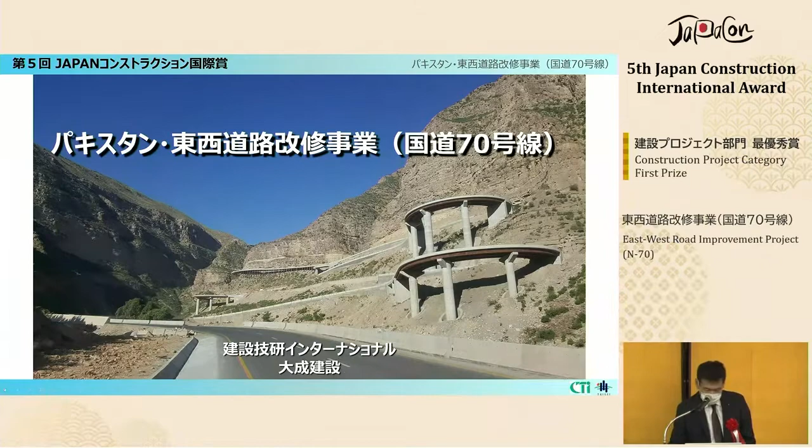This project is part of the National Road Improvement Program in Pakistan, financed by loan assistance provided by the Japanese government. The aim is to enhance the overall capacity of the N70 corridor and make the road more resilient against natural disasters.

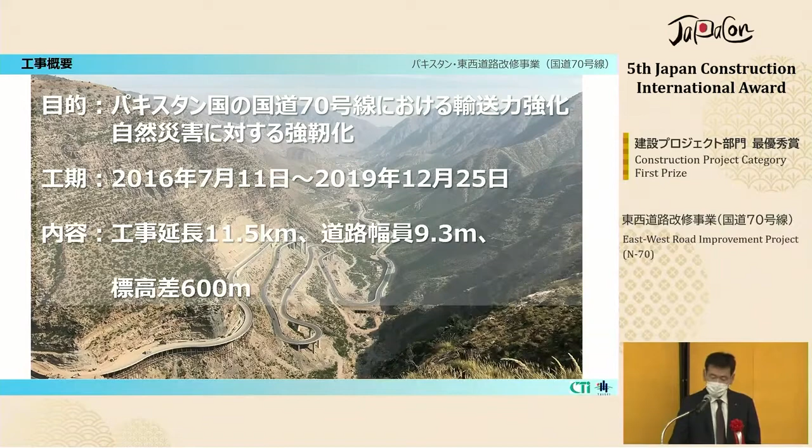The consortium headed by CTI Engineering International provided advice and expertise in design and operation management, and our company completed the construction. The project improved a 12-kilometer road with a height difference of 600 meters in steep mountainous areas. Construction started in 2016 and completed in 2019.

This is a map of the area to give you background on this project. Route N70 is one of the major highways running through central Pakistan, connecting the two major cities in the east and west of the country, from Multan to Quetta, 445 kilometers in distance.

There are major cities like Islamabad or Karachi in the eastern flank of the Indus River, which runs through central Pakistan, and there's a well-developed transportation network connecting north and south of the eastern half of the country, but there are only a few major highways connecting the thriving east to the mountainous west.

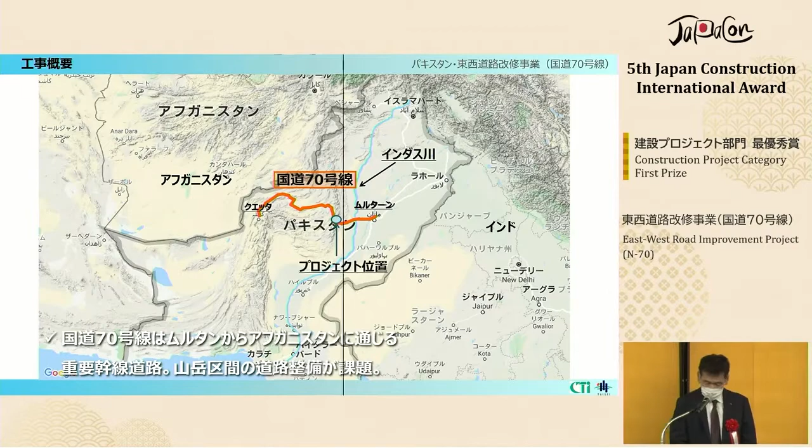Route N70 is an important road connected to the border with the neighboring country, but improvement was coming in late because the section in the scope of this project is known as the hardest part in the steep mountainous areas, requiring advanced construction technology and expertise.

This is the situation of the road before the project started. Sedimentary rocks form the steep terrain, making it a vulnerable foundation, with weathered rocks strewn on the slopes beside the road.

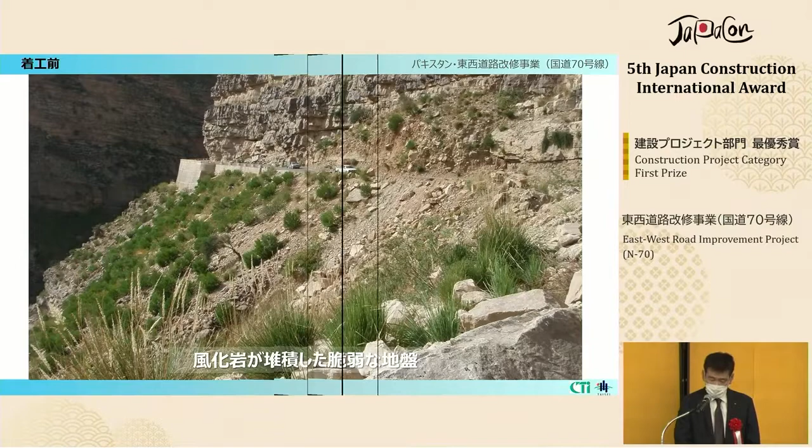The narrow road itself runs on the steep slope with a lot of congestion and closures along the way due to debris and fallen rocks.

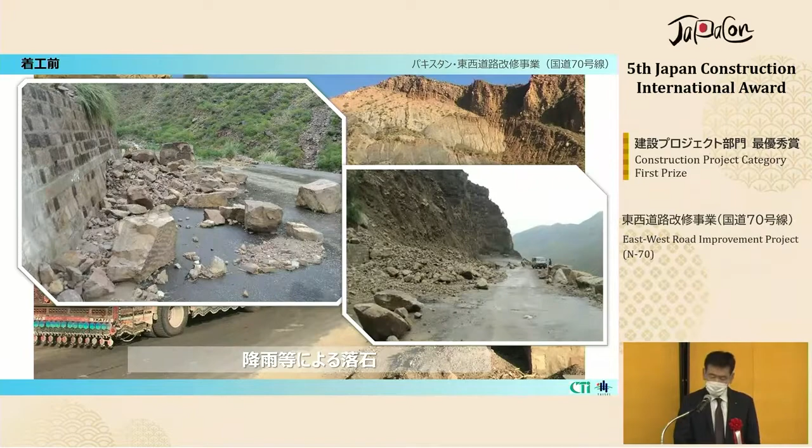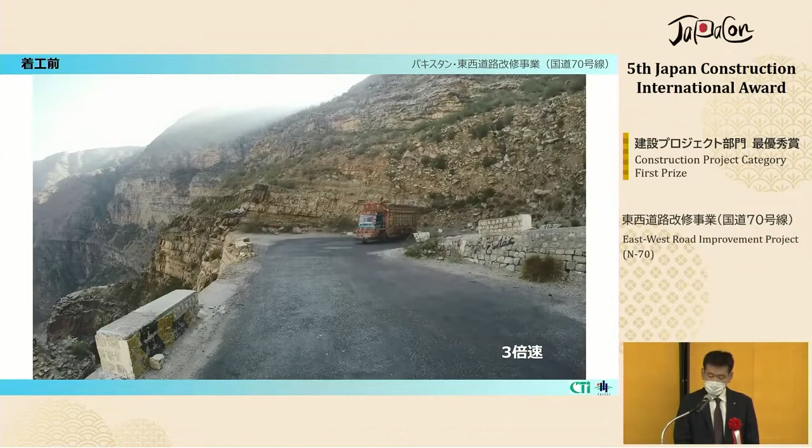The section of road in scope of this project was particularly narrow and steep, with a series of tight curves, and vehicles had to stop to go around them. As shown in the picture, these trucks needed to turn the wheel several times to let other cars pass through them.

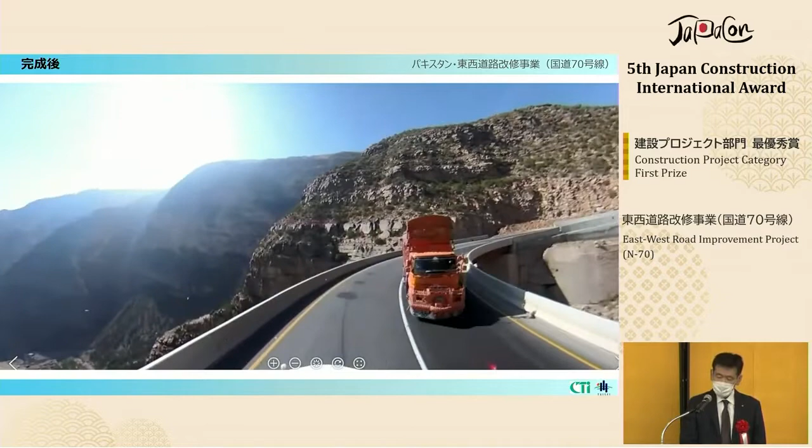This video shows the same section of road after the improvement. There are 2 lanes on the road, and those curves were made much smoother so that heavy trucks can easily go around.

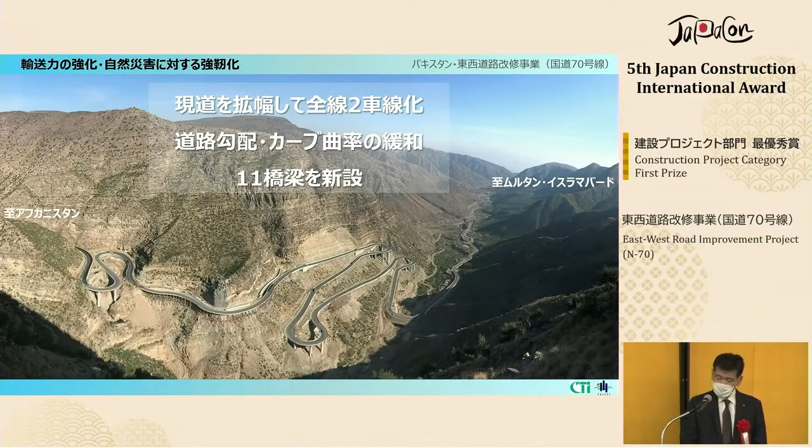This is the summary of the construction methods adopted in this project. The aim was to increase overall capacity and resilience against natural disasters. We expanded the road width to 2 lanes from end to end and improved road alignments in terms of slope and curvature by constructing additional 11 bridges at the steepest sections and sharp curves of the road.

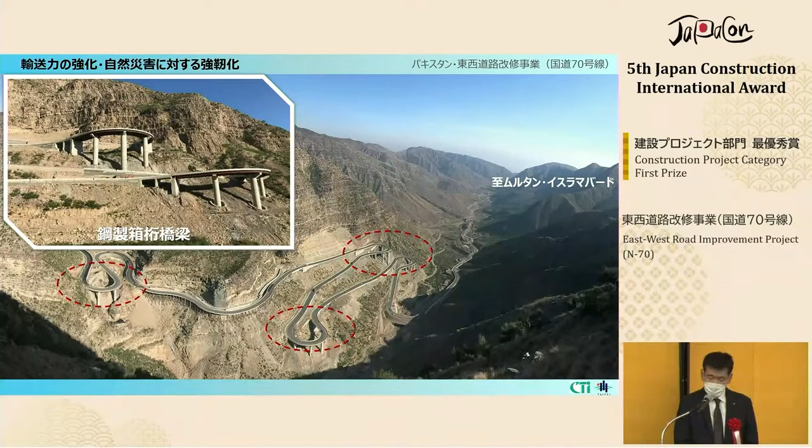For the tight curves on the steep slopes, shown in red circles, we constructed circular steel box girder bridges. These box girders were imported from overseas and installed at the existing road as appropriate.

For sections of road that were particularly narrow, represented in blue circles, we adopted a prefabricated steel widening bridge, using the launching erection method so we could expand the road width without obstructing the flow of traffic. Weather-resistant steel was used for both types of bridges to reduce maintenance cost.

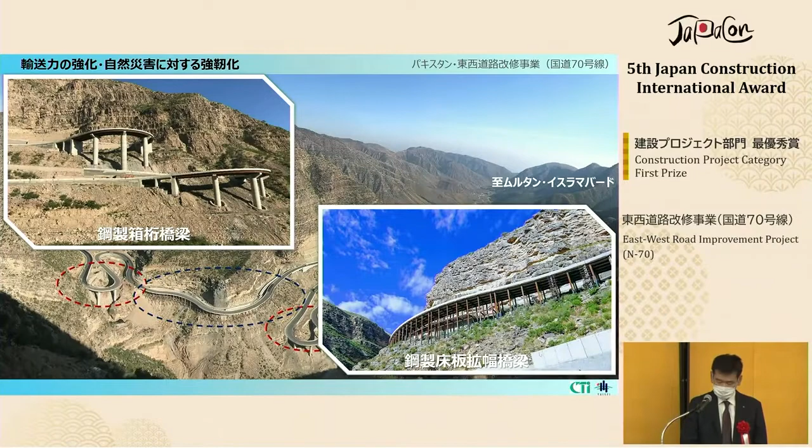Other Japanese engineering methods and technologies adopted for this project include ground anchors to stabilize slopes, as well as foamed cement banking method, and mechanically stabilized earth retaining wall construction, to improve road alignment and reduce life cycle cost.

You're watching aerial footage of the section of road in scope of this project. It clearly shows that it is very tough, steep terrain.

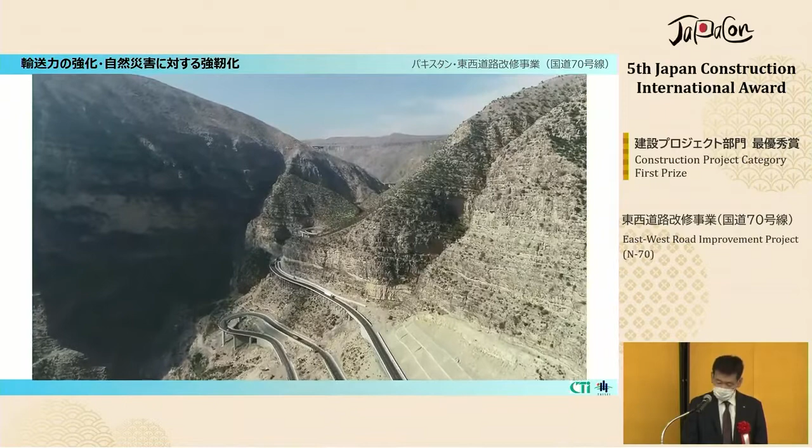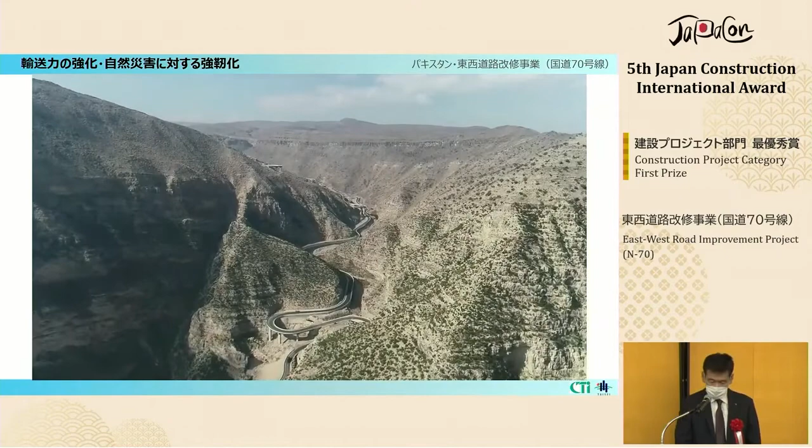One of the biggest challenges was ensuring security in the area. We needed to reinforce security around the workers' camp and offices. The client also hired armed security guards to protect the camp and provide security to workers traveling. Staff coming from Japan experienced some inconvenience, but we were provided with security information by the Japanese Embassy, the Ministry of Foreign Affairs, and JICA so we could successfully and safely complete the project.

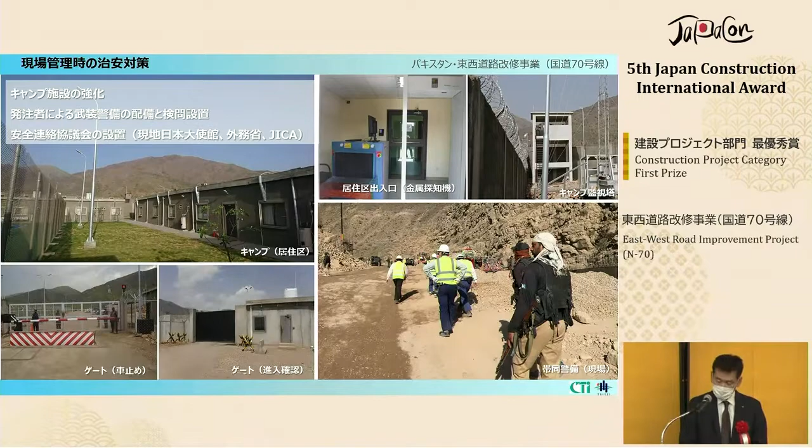Last but not least, let me talk about some initiatives that deepen the friendship between Japan and Pakistan. It was difficult to conduct PR activities during the project due to security concerns, yet the Japanese construction and engineering technologies used were featured at events and parties organized by the Japanese Embassy with government officials of Pakistan, including a meeting with Pakistan's Prime Minister.

We also engaged the client in writing a maintenance manual to ensure proper maintenance, and engaged local construction workers in skill training with Japanese companies. After the project was completed, some of the workers are now involved in construction projects in Japan.

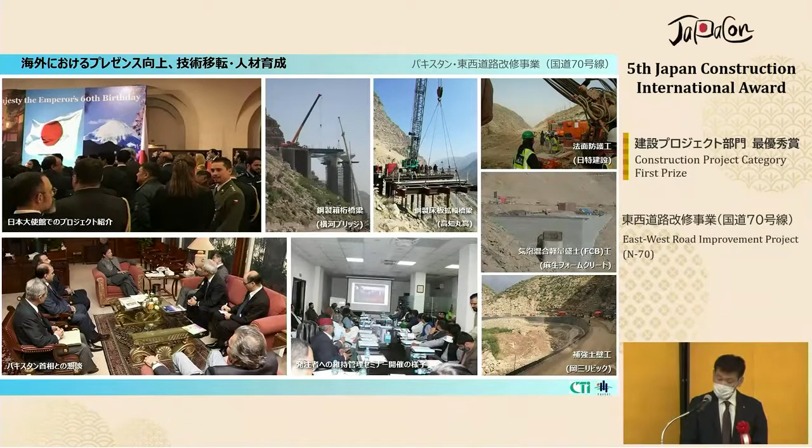This project accomplished the mission of improving the national road in Pakistan using Japanese technologies. We are convinced this project wouldn't have succeeded without the team of Japanese companies mobilizing their expertise and resources. We are also extremely grateful for the support from the Japanese Embassy, the Ministry of Foreign Affairs, and JICA. Last but not least, we want to express our deepest appreciation to the Ministry of Land, Infrastructure, Transport, and Tourism for this precious award, which highlights the achievements of Japanese construction companies. Thank you very much.